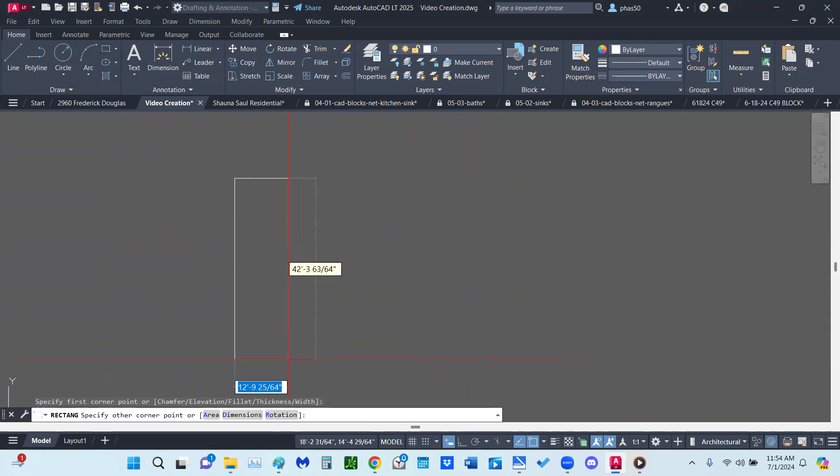Let's make sure, it says specify first corner point. CAD is asking you to specify the first corner. So I specify here and I leave this hanging. Now, if you notice at the bottom here, it's going to ask me for the area, the rotation of it, or the dimensions. In this case, I want the dimensions. So I can click D on my computer, but I said I'm going to do the long way. I go and I click on D. You see it disappeared. It's going to ask me, specify the length of the rectangle.

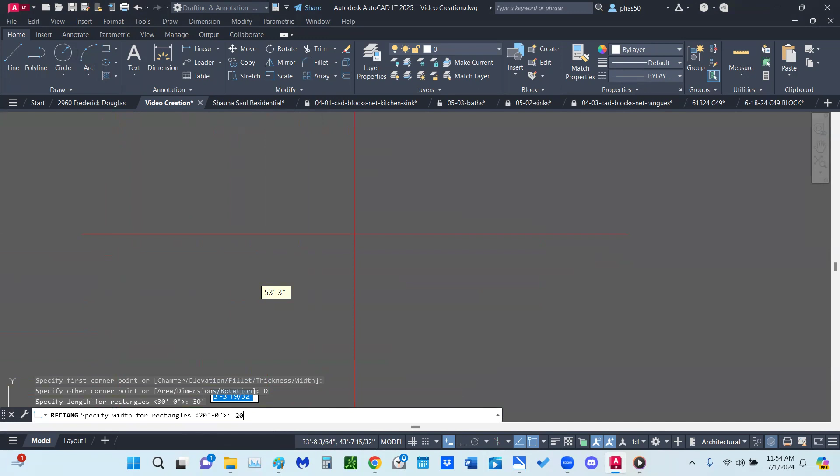So I'm going to type 30 apostrophe, or 30 feet, that's the sign for 30 feet. And then I'm going to click enter on the keyboard. And then it's going to ask me specify width for a rectangle. I'm going to say 20 apostrophe enter. Then I'm going to click with my mouse.

Now I'm going to go and use the offset tool. Offset, in the home tab, in the modify panel. This is where I can copy my stuff. I can move, and I'll come to that in another video. So I'll click on offset. It's going to ask me specify offset distance.

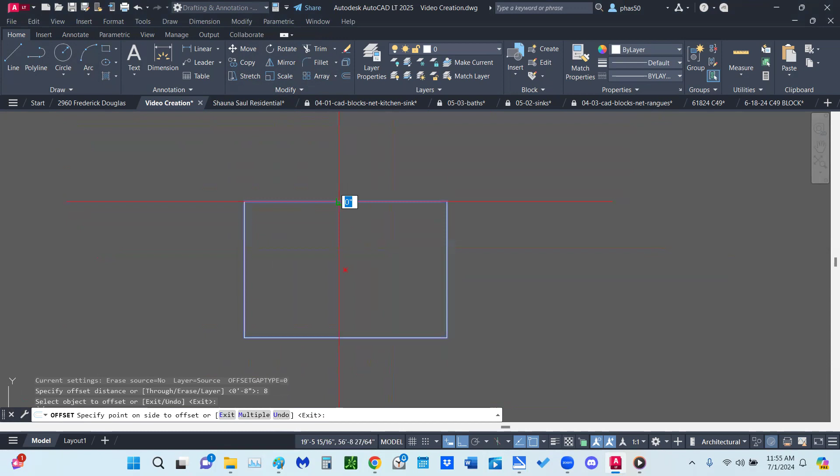So I'm going to make 8 inches as my thickness. So I'm going to type 8. I don't have to do anything, I don't have to put the inch, which is the quotation mark. Just 8, CAD knows I mean inches. So I'm going to click enter. And I'm going to click here, and I'm going to click there. So now I have a simple floor plan.

I'm going to call this a simple floor plan. I'm not going to put bedrooms and all of that in there. So now I need windows, and I need a window here and a window here. Sorry, a door here and a door here.

Let's say I'm being asked, I want the door. The door should be 18 inches from this wall, 18 inches from this wall, and the opening should be here. So I'm going to use a polyline for that.

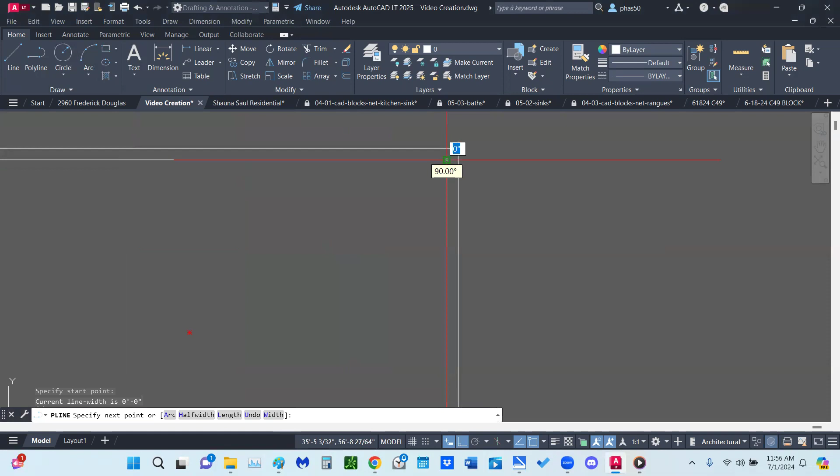And I'm going to grab from here, make sure that I get the endpoint, make sure that my ortho is on so that the line stays straight. This line is not important, you can come as far as you want, but it's better to stay near here. I'm going to click once. I'm going to come down. This line is important because I want this line to be 18 inches from here.

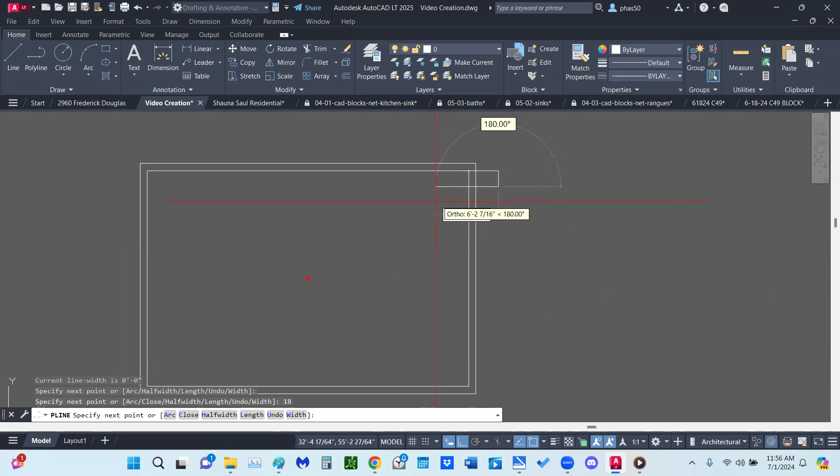So I'm going to come down and type 18, enter. Then I'm going to come across. This line is not important, the length of this line. This one is, and my door is going to be 36 inches. 36, enter. Notice I'm not typing in this line, I'm not typing the inch, the quotation marks.

So I click there. Escape. Now you're wondering what's next. Now this is my door opening. So I'm going to go and use the trim command. Trim.

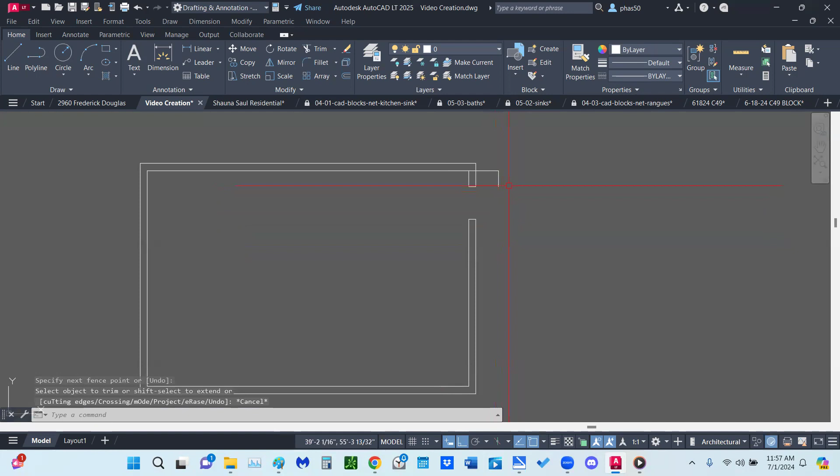Trim, trim. I'm going to leave this here. That is why I use a polyline. Now notice I just have to touch there, I didn't have to highlight everything. That's why I use a polyline. I just click there and I can erase, use the erase in the home tab, in the modify panel. I can use erase, or I can type enter, or I can do delete on my keyboard, but I'm going to do the long way.

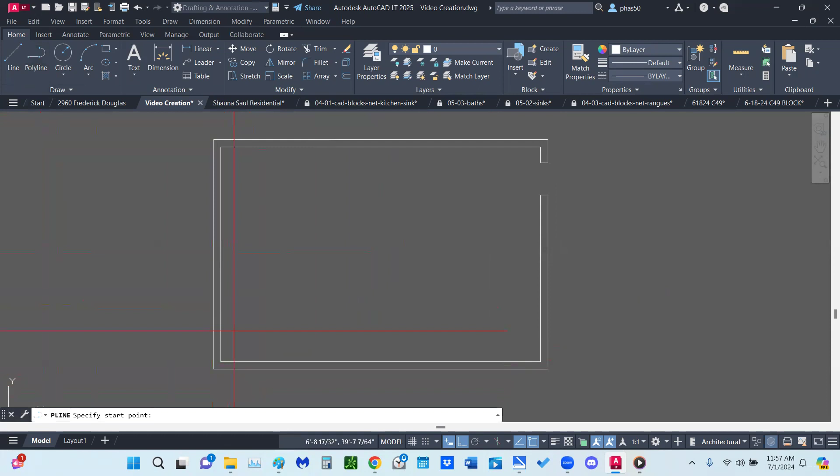Erase, that's it. Now I can do the same thing here using a polyline, right? So I can come out, not important, very important, 18, enter, very important, 36, enter, out.

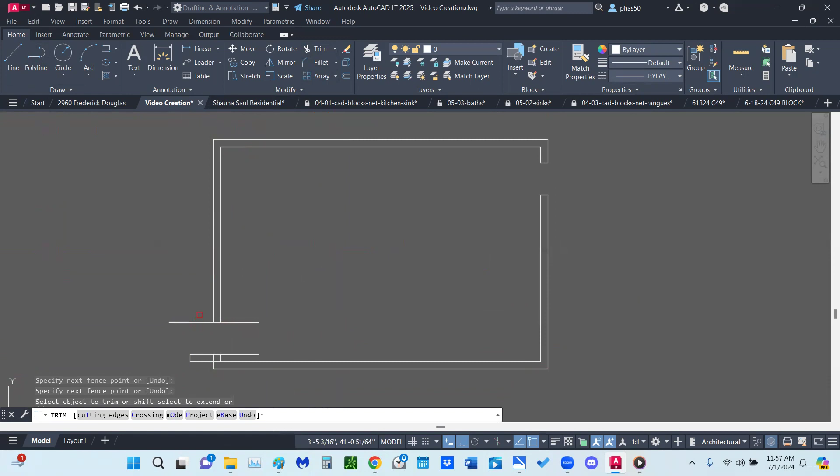Trim command. Trim, trim, trim, trim. Highlight, erase, right? So now I have two doors.

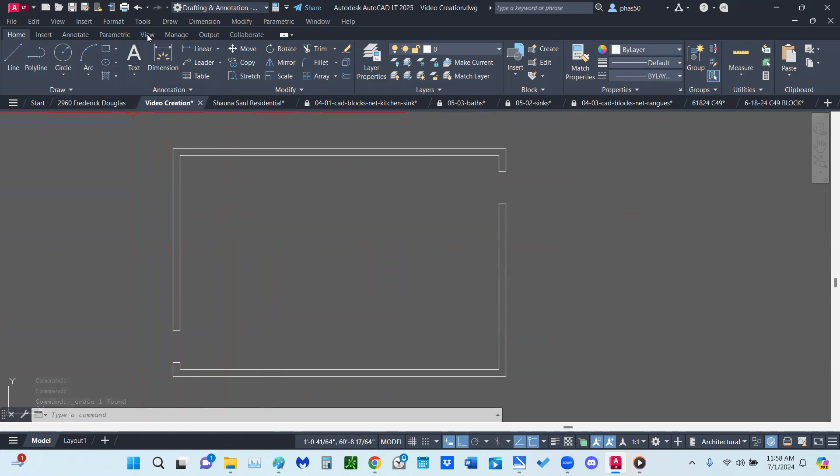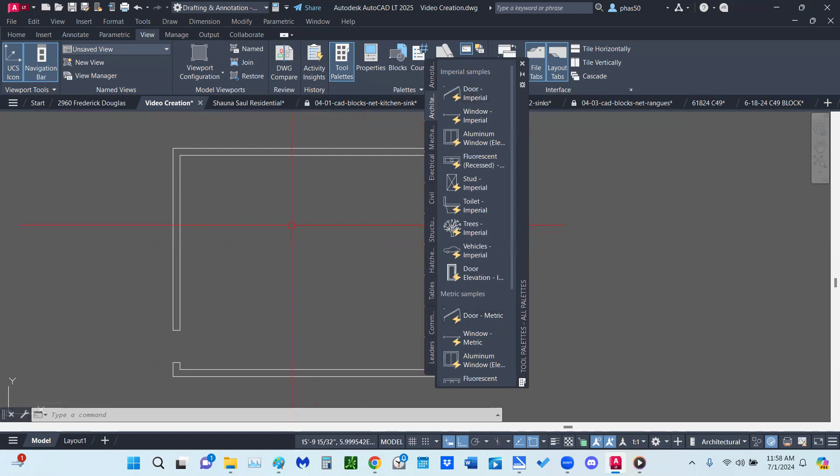Now I need to have doors. You can either make them yourself, but you don't have to. All I have to do is go into view. I'm now moving from the home tab. In the view tab, I'm going to go to the palettes compartment or panel, and I'm going to click on tool palettes, and it's in here. This is a door, imperial door, and you also have metric doors, but I'm drawing in imperial measurement, feet and inches, so I'm just going to click once.

I'm going to bring this out, and I'm going to leave it there, and I'm going to take this off. So remember: view tab, palettes panel or compartment, tool, grab, drag, right?

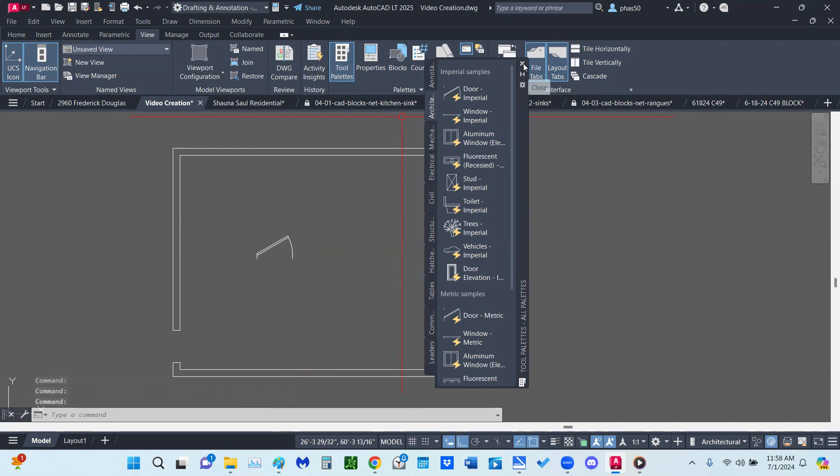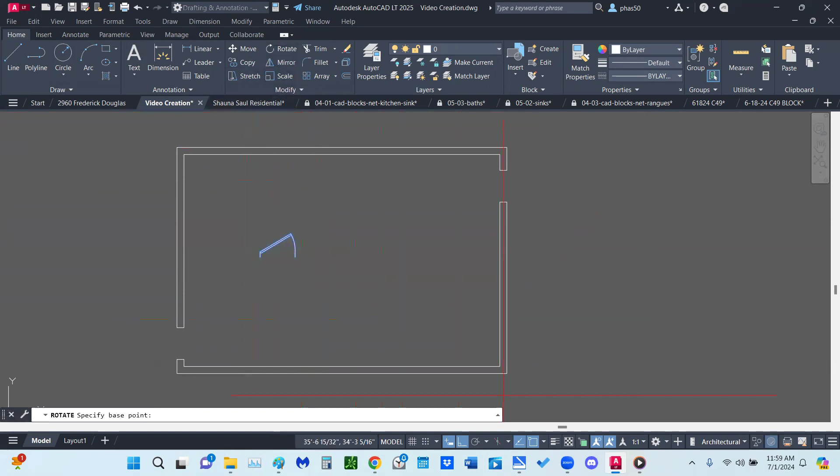Good, I'm going to go back to the home tab. So I'm going to highlight this because I want this door to come here, but I'm not going to try to put it by move, I'm going to rotate it. So I'm going to rotate, right? Let me show you. I'm just going to highlight, click on rotate. My ortho is on, so I'm going to snap it right here and pull my cursor down. Notice? It's rotated 90 degrees.

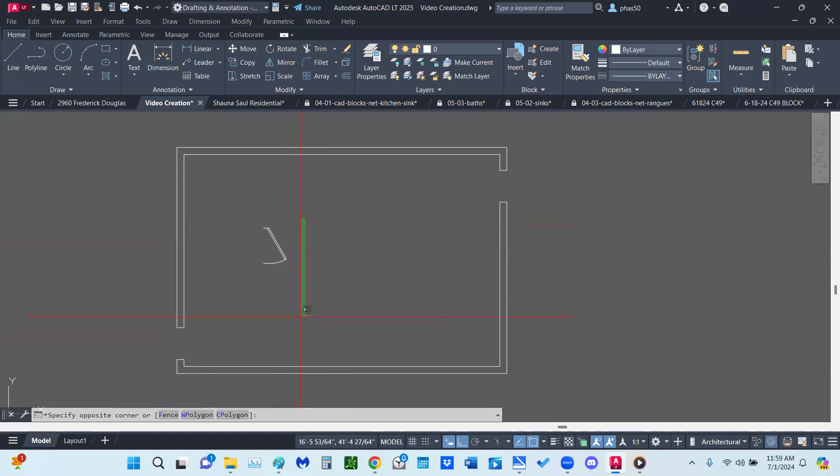So I'm now going to move this using the move command. So I'm going to highlight it again, move, click on move, and I'm going to bring this door and place it. Now notice, because my ortho is on, I don't have to take my ortho off. This is very important. I don't have to take my ortho off. Let me move this just to show you what I'm talking about.

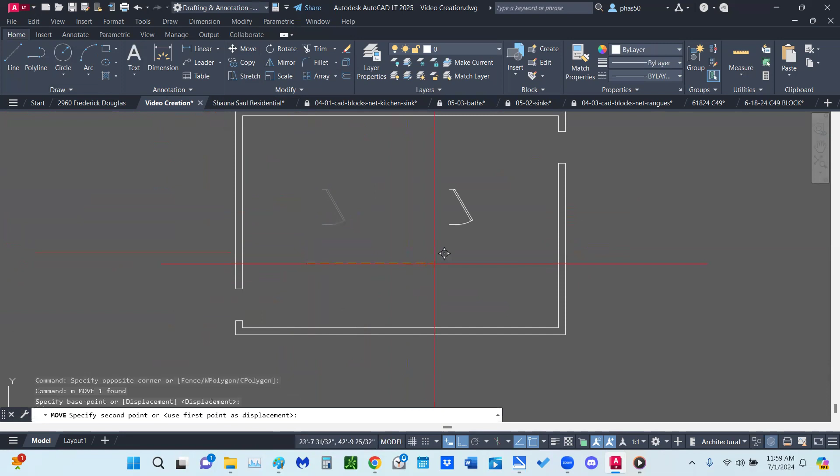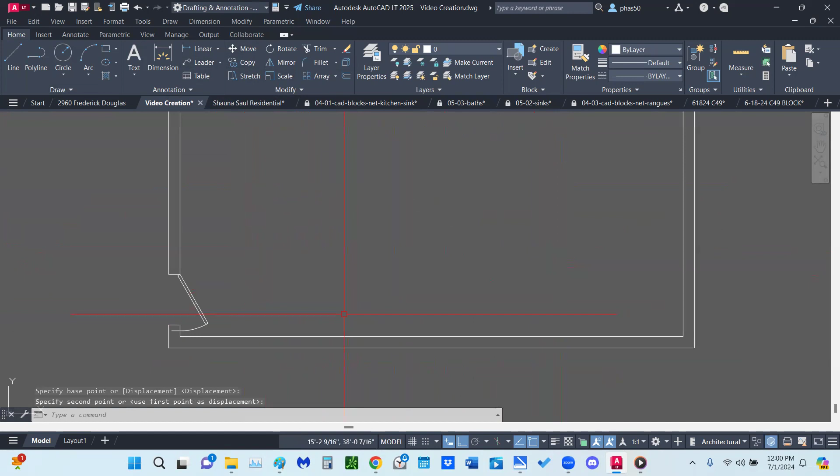I'm going to put it here. Now I don't have to take my ortho off. So I'm going to move this and bring it here. Notice it is not coming where I want it, but pay no attention to the object, pay no attention to the object, pay attention to your cursor. And look what would happen. Immediately, it would override the ortho. The snaps would override the ortho.

Now, my door is larger than the opening, but I don't have to worry, this is a dynamic block. So I just snap here, and I bring it there.

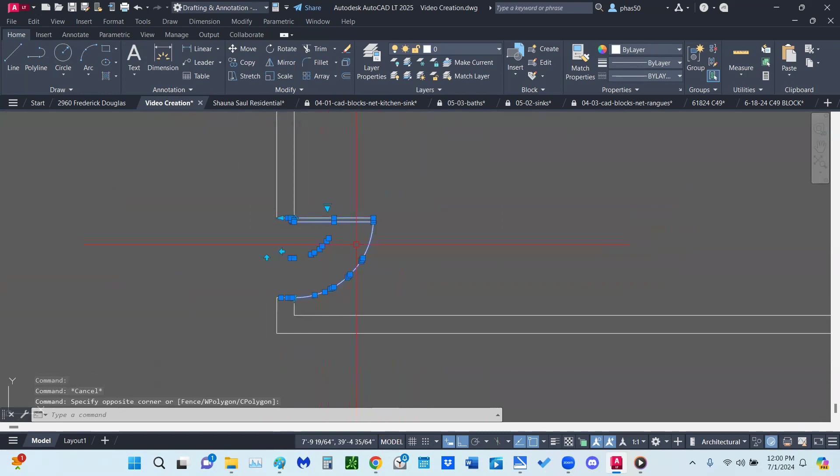Now there's other things I can do. I can open it 90 degrees. If I want it, I don't want it opening like this, I want it opening to the wall. I can come and click here and it would open like that, right? This is how it would open. And I can do many things, I can let it open outside, etc. But that would have some problems with it and you would have to move the door again.

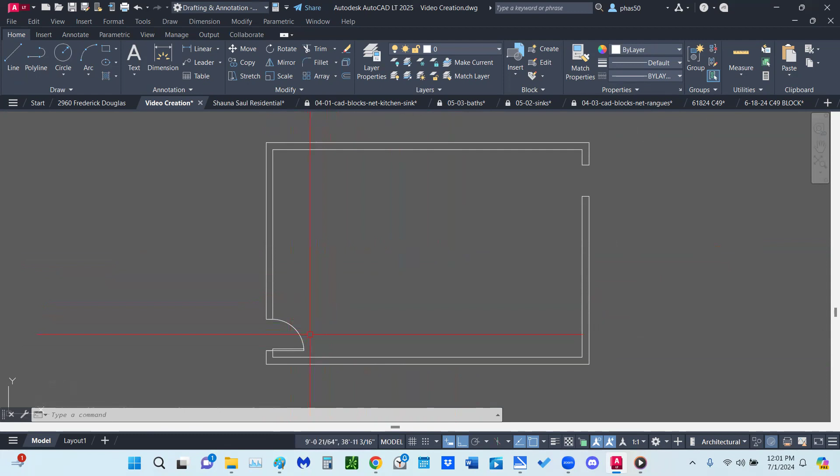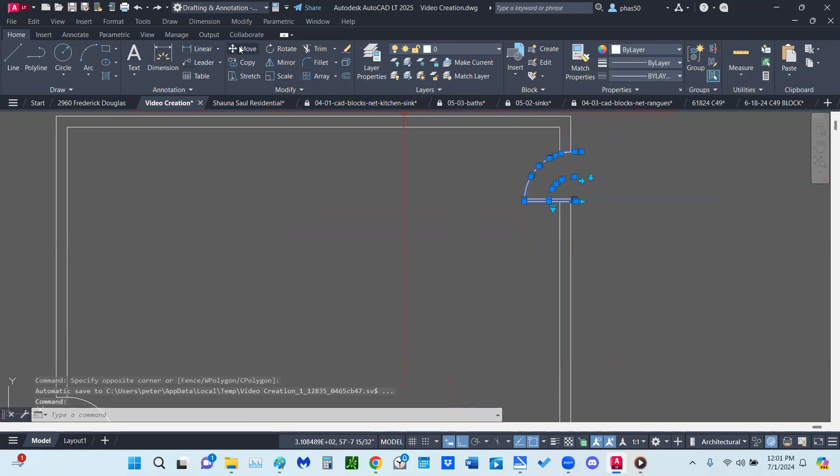So the time frame that I have for the video to post it is not long, so now I don't have to reinvent the wheel again. In other words, I don't have to go back into Insert to get another door. Highlight, copy, place, but I don't want it there. So, like that, you notice, and I willfully did that. So now you have to move your door again and bring it inside.

But look, you don't want it opening like this, you want it open to the wall. Highlight, open to the wall, right? So we have our two doors, and we can also

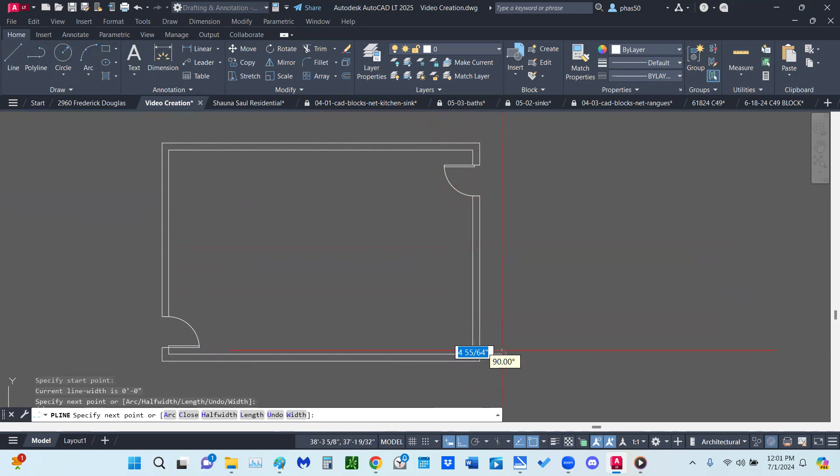do the same thing for our windows. We can use a polyline and I'm just going to do this quickly. So I can come here, this is not important, 18, enter. This way, come up, and I'm going to do 48, enter. And then I come, this is going to be my window.

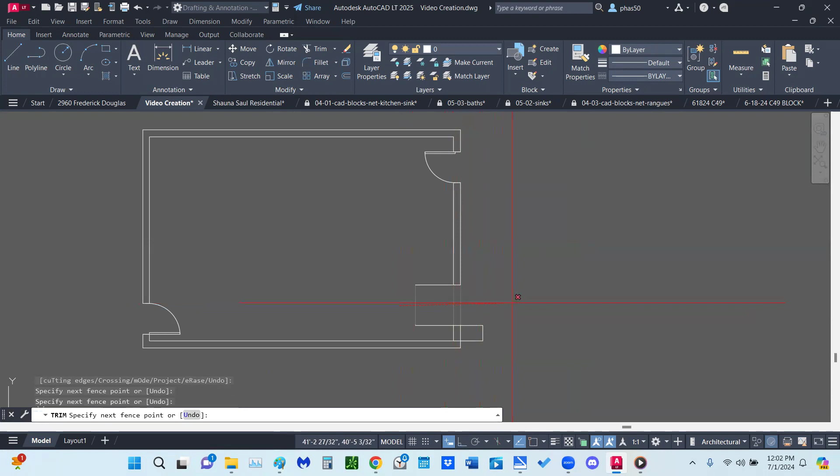I'm not going to place the window in here at the moment, but I'm going to trim as per normal. I can trim like this, like that, like this. Trim this one out. Highlight. I have my window opening.

So that will be it for now until I make another video, and I'm going to show you a few more things that you can do. So I'm going to stop the video and post it.